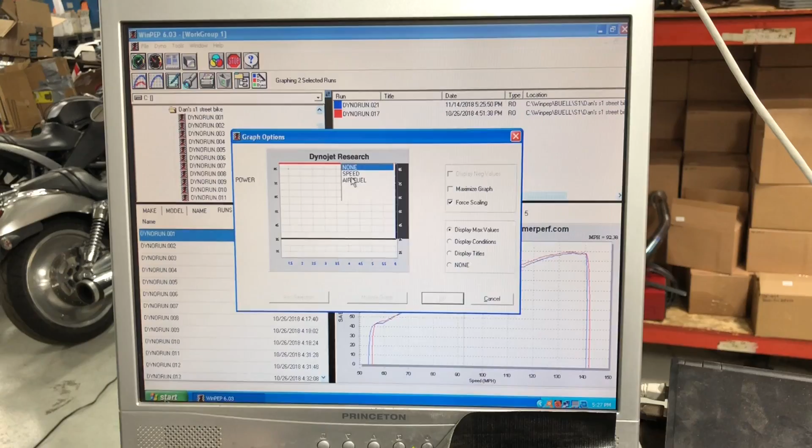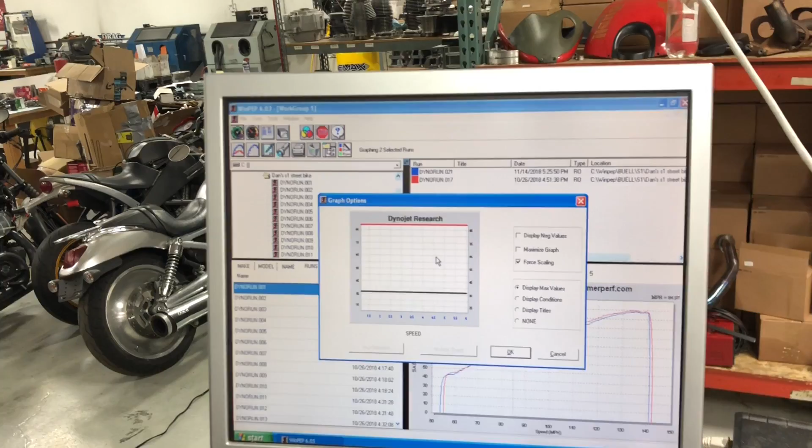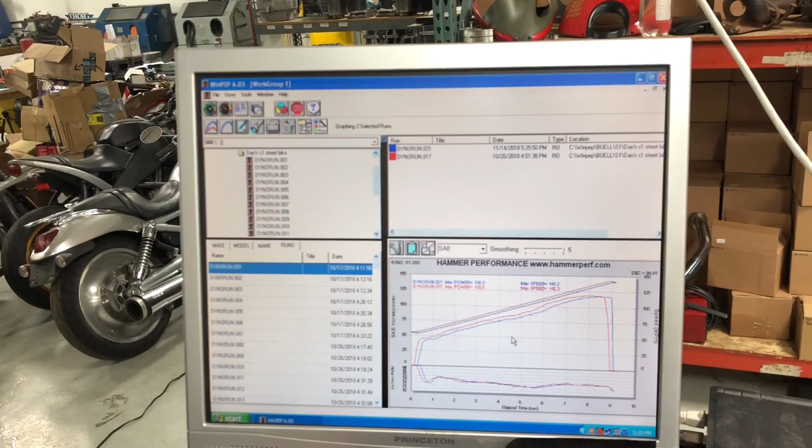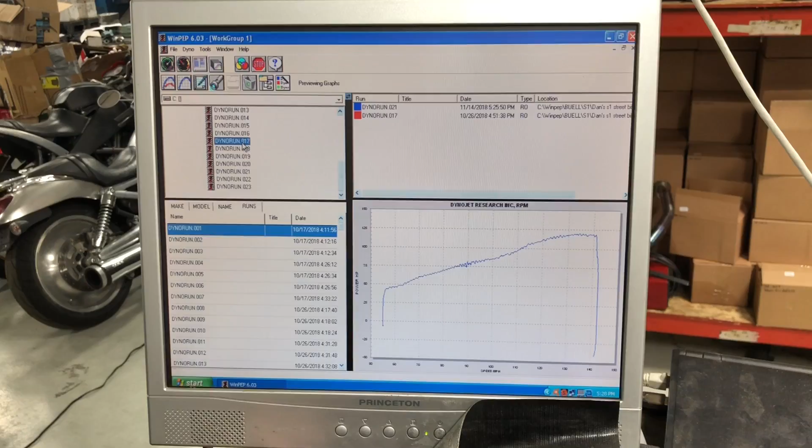So let's get rid of those. My bad. Graph options, multi-graph. You know what, we weren't... Yeah, I don't think we were hooked up properly, so I don't know if we're able to. We can do power, speed, air, fuel. That don't work for us. Anyways, let's do this. So let's go. 021, 017. So we'll fix that and get the RPMs working. I saw on the tach it wasn't working, or on the dyno it wasn't picking anything up.

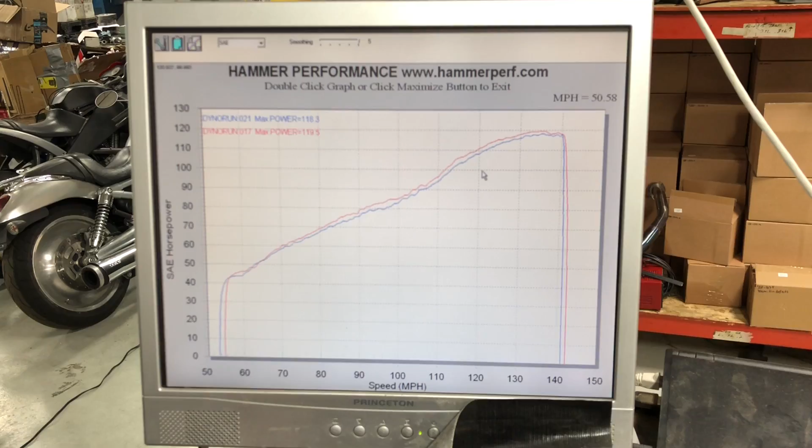So we fell short on our number here a little bit. I think we maybe are a little bit too far advanced on our timing, so I'm going to roll the timing back to the place where we were at the 119.5 and see if we can duplicate that. We'll go ahead and do that here real quick.

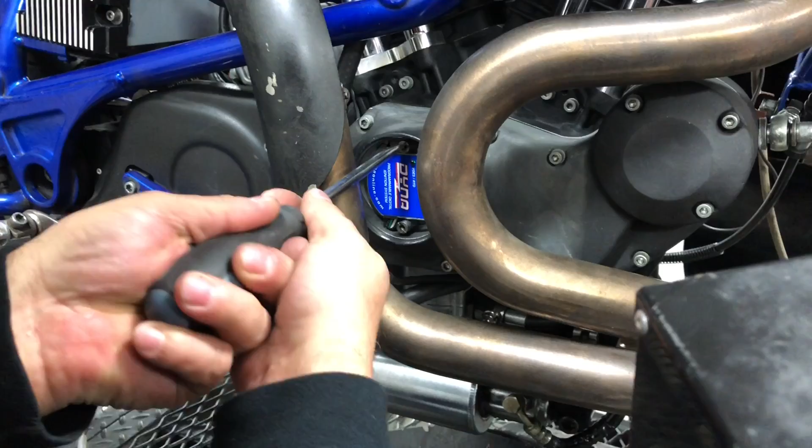So I have a mark on where we were at there. If I can see where we're at, let's put it there. All right, let's give it another shot and see if we can go ahead and change some things here.

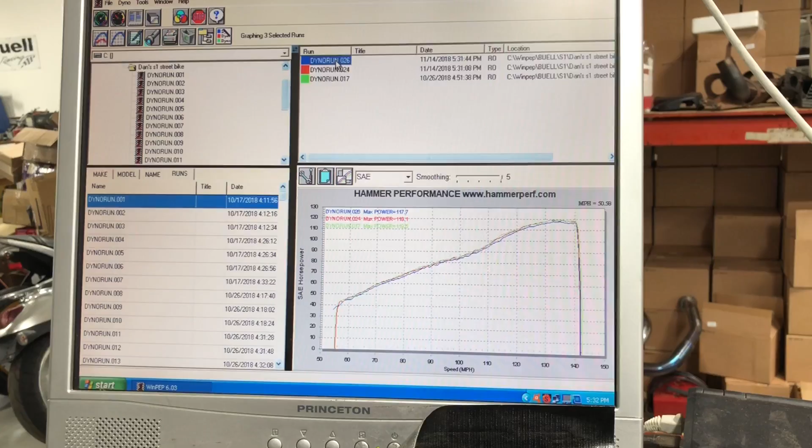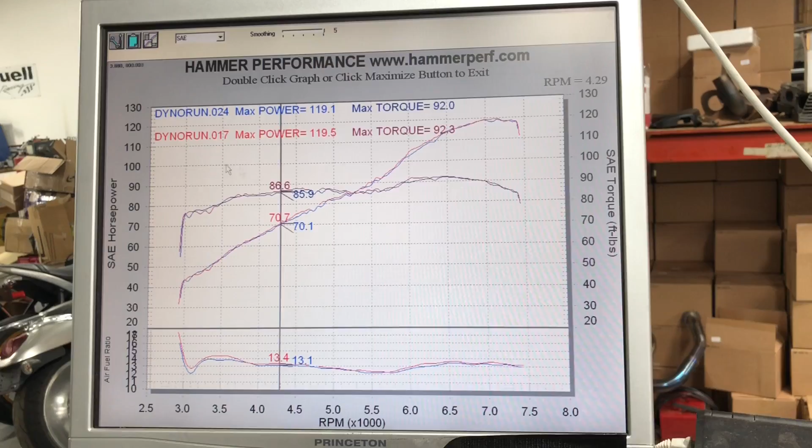Okay, so we got a little bit closer with a 119.1 at 92. So let's go ahead, and that was, I believe, 24. So we'll leave 24, we'll get rid of that, that, and that. Okay, so we kind of basically mimicked where we were at there.

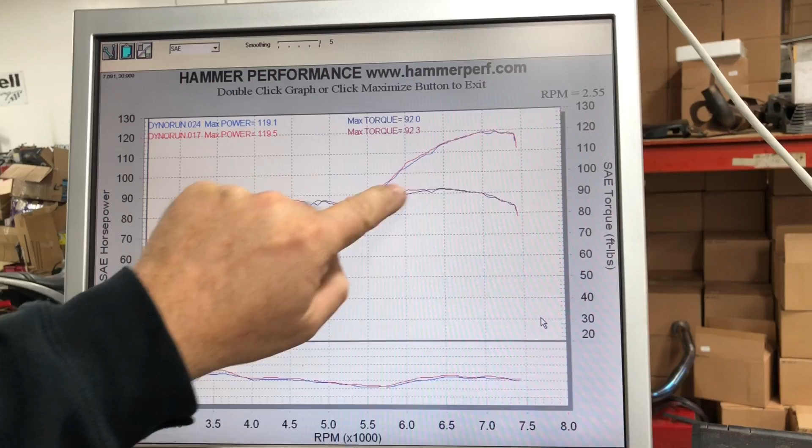You can see how we get a lot of reversion here with this dip, which happens right down here, where the pipe torque peaks, and then it kind of reverts and torque peaks again, which is really nice. We like the double torque peak there because horsepower is torque times RPM, so as we torque peak here up high, we help build that power up there as well. So I really do kind of like the pipe. It works pretty dang good. I'd like to see this a little bit higher and kind of pull a little bit more up there.

I'm going to go ahead and retard the timing, I think, just a little bit more, just to see if it changes our number, if we fall off, or if we pick something up a little bit more by retarding it. We're still a little underneath our line here, so if we retard it, maybe that helps pull that up again to match that number.

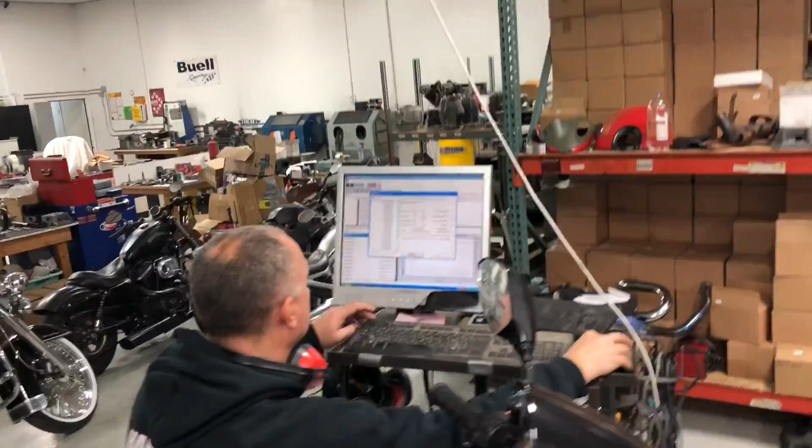We're really close, close to that 120 mark, 92... I'm sure if I keep ripping on it we can get to 120, but I'd like to play with the timing just a little bit more and see if we can find that sweet spot from where we left off. We only changed the timing one time last dyno session, so we'll work with that and play with it a tad more, and see if we can get her to come up a little bit more. So we're going to retard it a little bit more from where we sit.

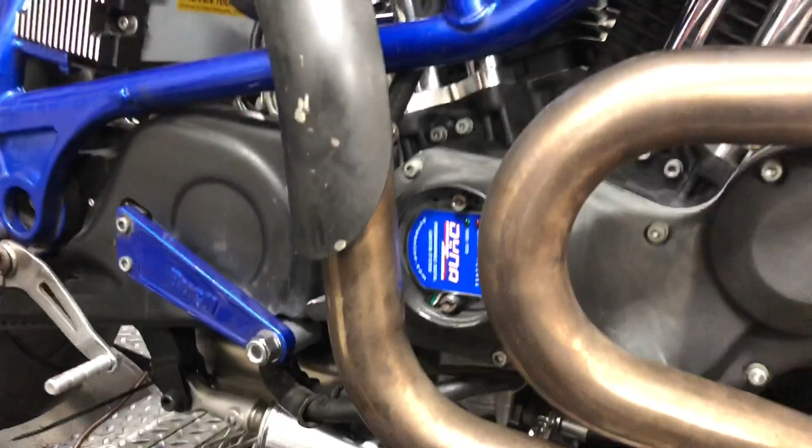Like this. Okay. There we go. Let's cool her down.

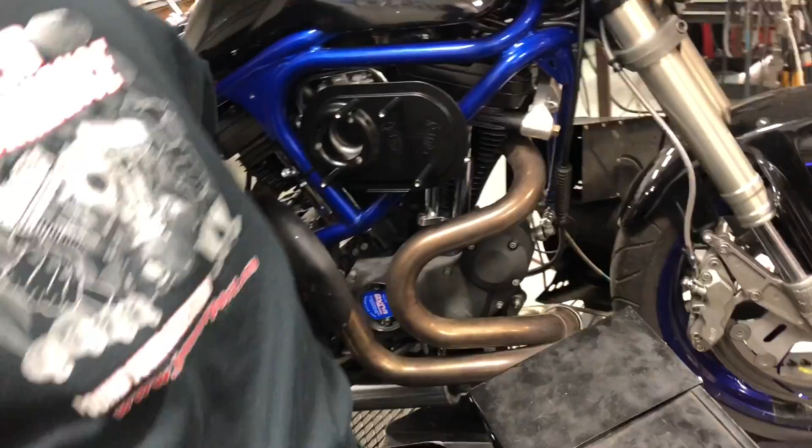We'll let that cool down a little bit before we fire it up again. Cylinders are a little bit more, about 190 on the head temp. Cylinders are dropping down to about 175, so they will cool down pretty fast.

She's gonna be a fun little bike. Even where it sits right now at 119, boy, she should be a wheelie monster. First, second, third gear, kind of excited. A little disappointed the snow is going to start flying on us, so won't have much chance this year to get out and rip on it, but next year it's going to be a fun bike throughout the whole spring and summer. Can't wait to play with her.

All right, let's fire it up.

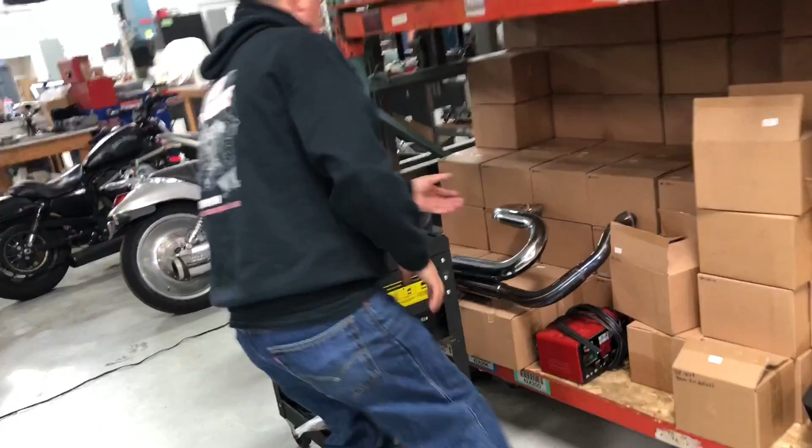Really curious to see in the end here when we take this end cap off what this pipe actually does. With that end cap on there, all of the exhaust gas is going to come through the baffled, perforated portion, then hit the wall on the inside of that cap, and work itself out the angled hole on the end of the exhaust. With the Patriot system, if we look at this while it's cooling down, you can see at the end of the Patriot, in the light, it's wide open through the perforations, and that's all you have. So you got a stepped header with the perforated portion there, and we're coming straight through.

So if my theory is correct, taking that end cap off we're now kind of duplicating the Patriot exactly, because the perforated portion of the SuperTrapp is the same diameter and same hole size as the Patriot. Of course the difference would be the stepped header pipes and the lengths, but I'm curious to see if taking that end cap off, with no back pressure whatsoever, we pick up a peak number on top. So we'll do that one next.

But let's pull this now, let's see where we're at, and see if we can get this to change.

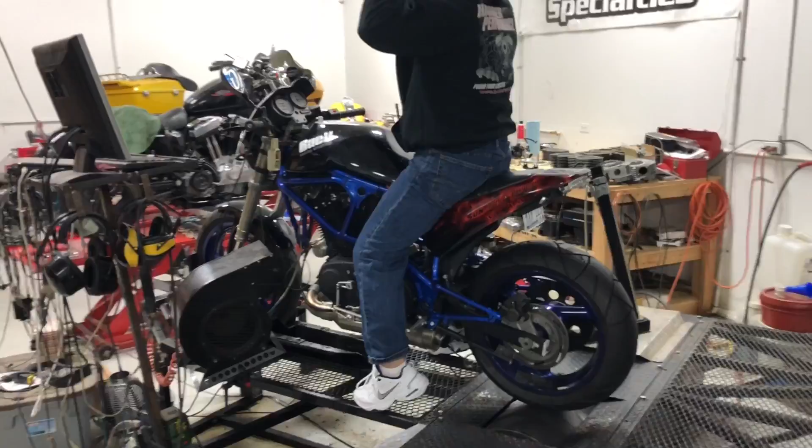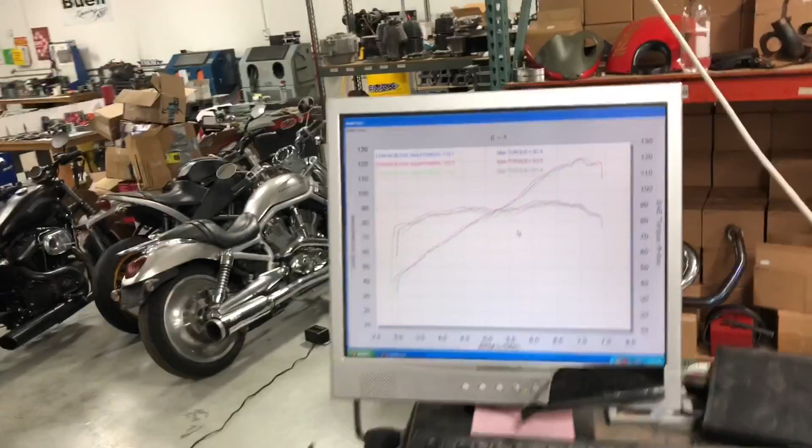All right, that's awesome, we did it. Broke the 120 mark, and even our second pull was 119.7. Adjusting that timing just a little bit definitely helped us. As you can see, just minor tweaks like that bring in a horsepower or two. I know we're splitting hairs here, but my whole goal was to at least see the 120 mark pop up. So that's awesome, we did that.

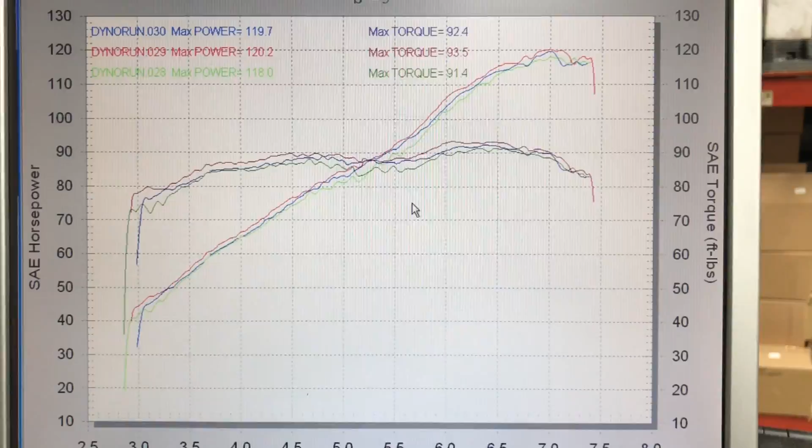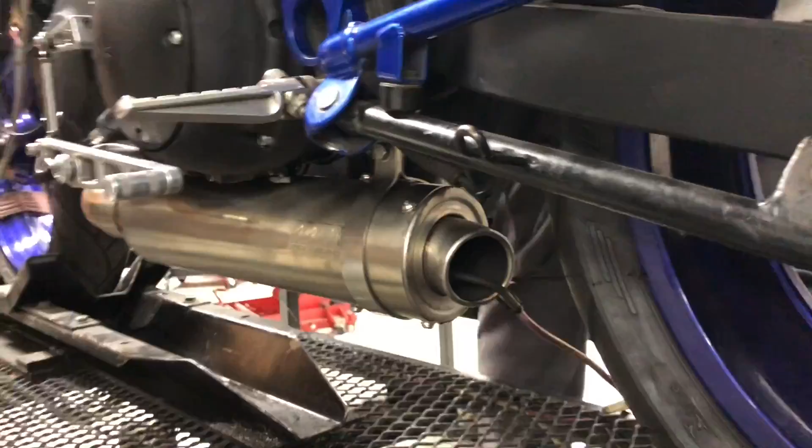We'll see if we can get it to come up more frequently by taking this end cap off. So bear with us here while we take that end cap off. Dwayne, do you want to cut the zip ties on that? Pull the sniffer out of there.

So we're going to need some... Dwayne, will you go over to the area next to your honing bench and get me some black gloves? Ouch, that one. It might be next to the press.

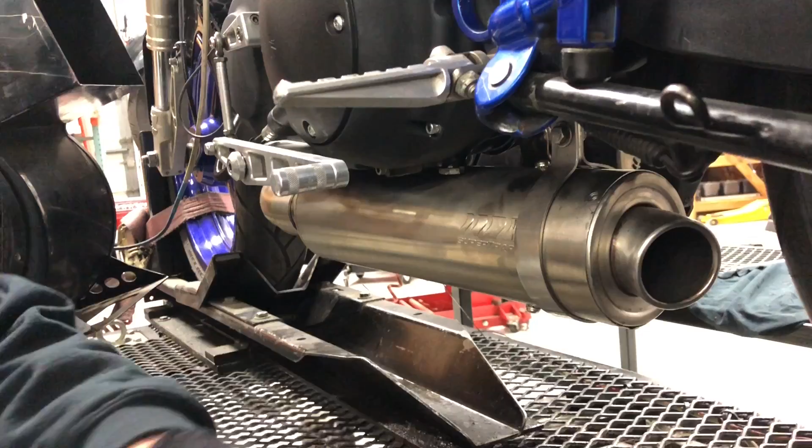Okay, so I got the bolts out. One here, here. Can you get me a right hand one? Two lefties. You're left-handed, right? Yeah, I am, lefty. Not both hands though.

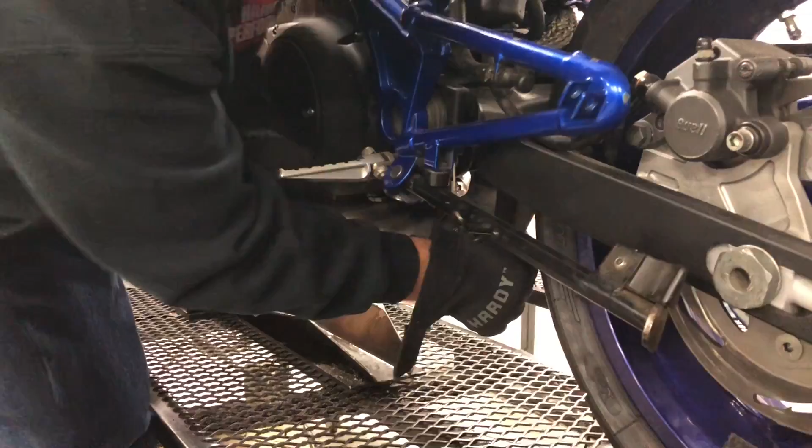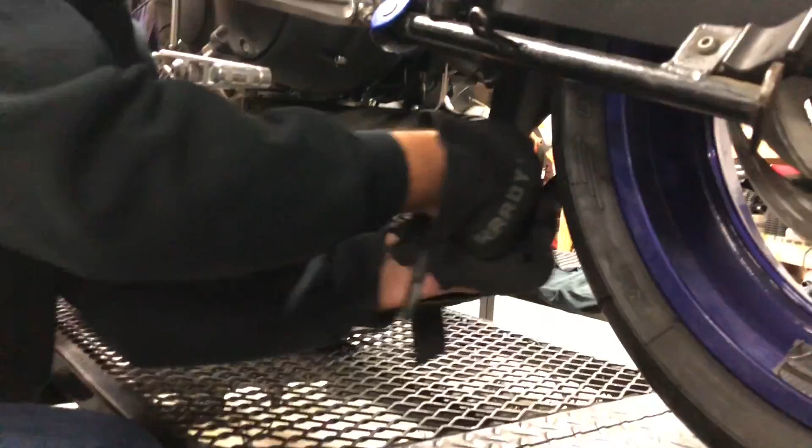Now the key is whether or not we can get that out of there. Got a bugger in there. There we go, it's coming. There, that's very hot, ouch.

Should be plenty of flow. Yeah, that's the whole goal here, just to see. It's a good test to see what opening it wide open like that does on our air-fuel curve, and what it does ultimately on our top-end number. So this will be an interesting test, let's see what we got here.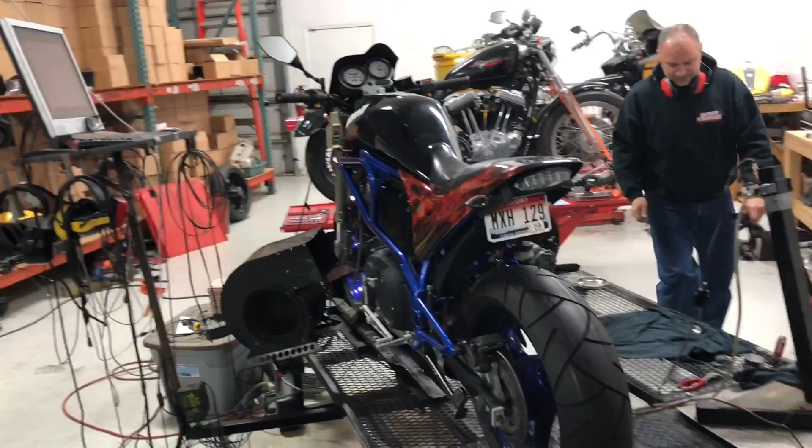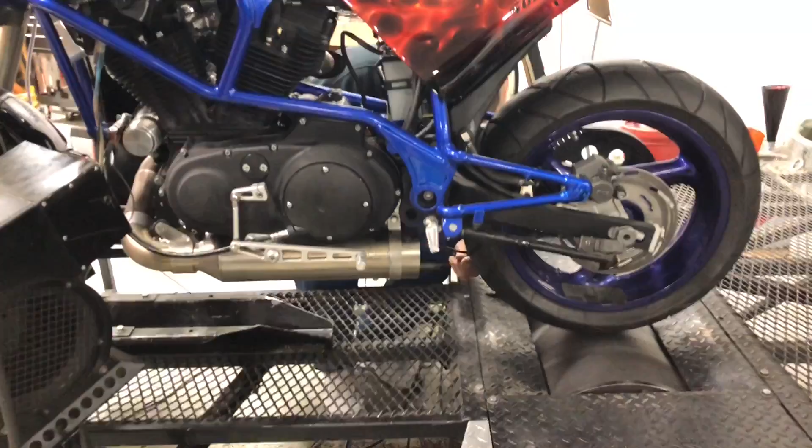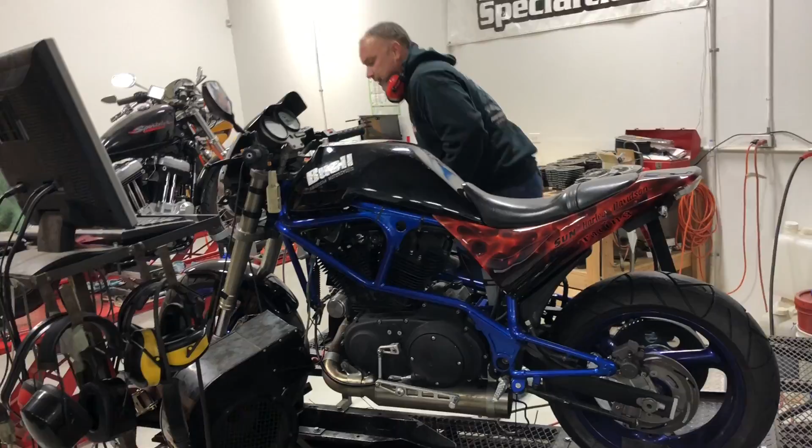So put the sniffer back in real quick. Like this. Okay, let's cool her down here a minute.

Okay, so again, we pulled that cap off the SuperTrapp down there, just for shits and giggles, to see what our theory is. Might shoot us in the ass, but who knows? May work, may gain a few extra ponies at the top. So this will be a true test to see if our back pressure was holding us back a little bit, or maybe it'd go the opposite way and lose power because of it. So we'll go ahead and see.

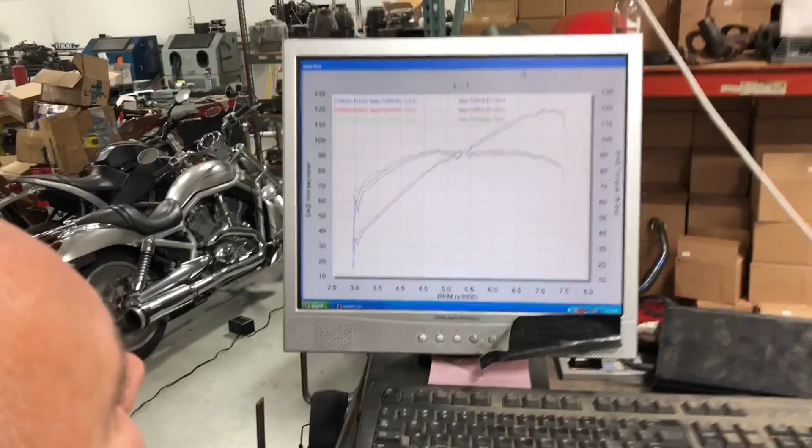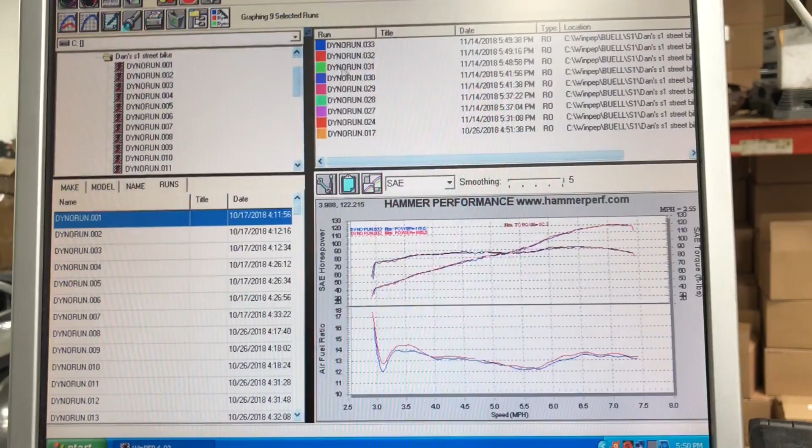All right, so looks like it made a little bit of difference there for us. We're gonna go ahead and get rid of the last pull. So let's do the 31. So 31 was our best. We'll take a look at the AFRs to see. And it looks like our 29 pull was a good one. And we'll get rid of the red.

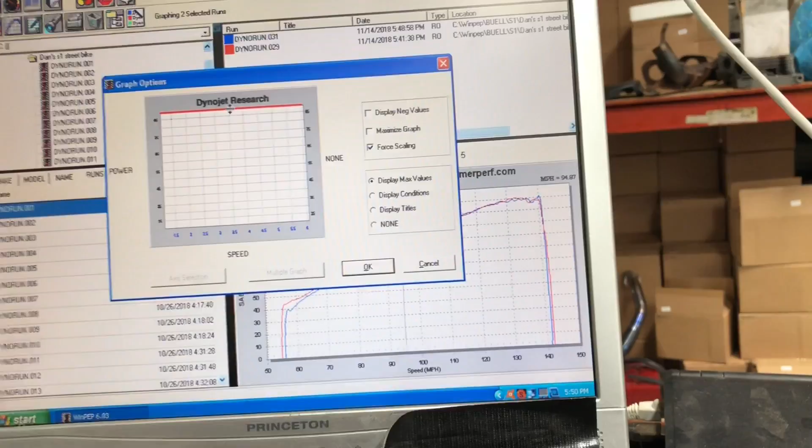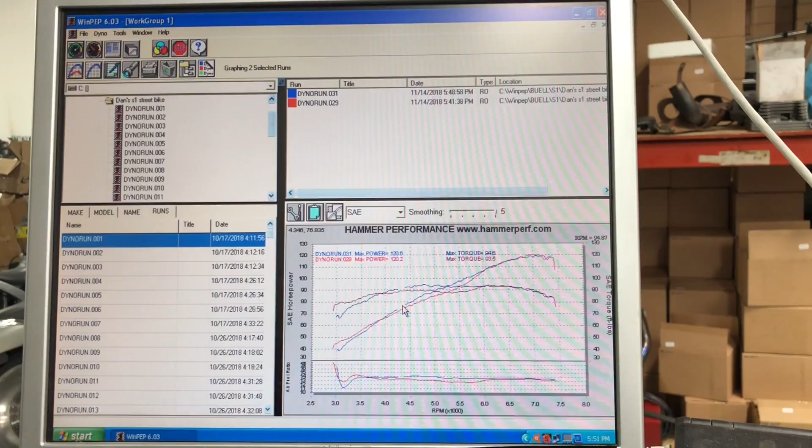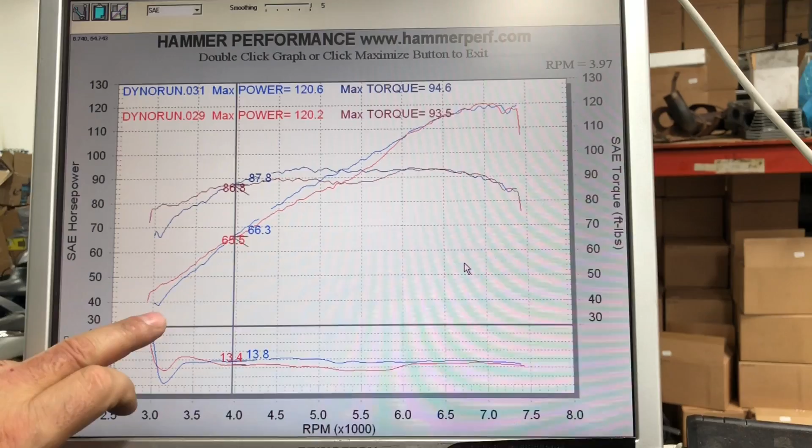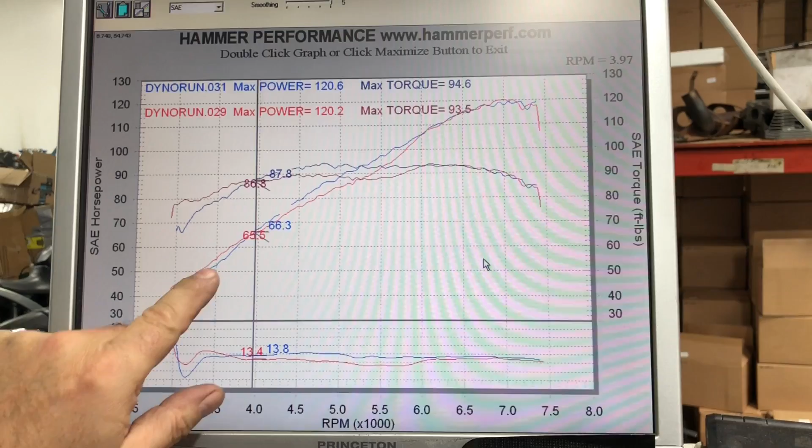Okay, so got a couple different things going on here. So the last pull, the 31 pull, boy, you can see I really like this. So there's going to be some more play in here. I don't think we're quite done yet. If you notice what happened here compared to our other pull where we hit 120 just a while ago before we took the end cap off, you can see here how we had so much reversion or dip in this middle down here where it went super, super fat. Look what happened when we took the end cap off to run it wide open with no back pressure whatsoever. We lost a tad right down here from 3,000 to roughly about 4,000.

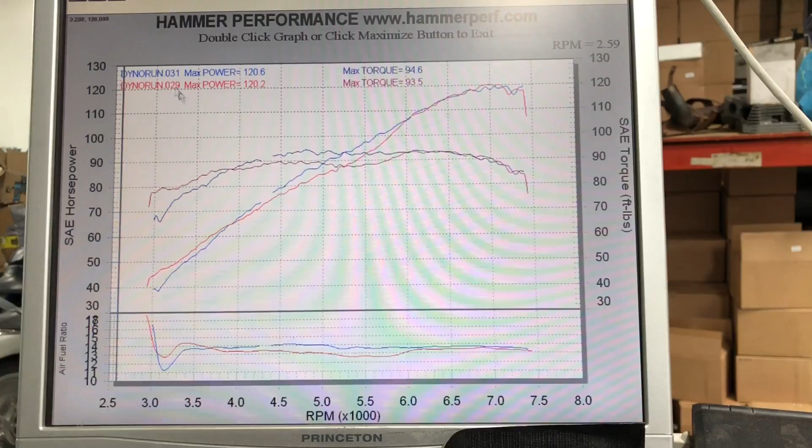So 3,000 RPM range, we're short by maybe a couple horsepower through there, okay? If we look at the two, 48 to 50 it looks like, 53 to 56, 59 to 60. So we're short a horsepower or so right through here. You can see that. Our 31 run, just recent, first of the last pulls here with the end cap off.

But boy, look at what it did to our mid-range. That dip that we saw here where it went really, really fat from the back pressure and the reversion in the pipe, we got rid of that. Isn't that nice? Look at that, just straight all the way up. We get a little choppiness all the way up here at the top. So I'm gonna look at that. Maybe we need to play with timing a little bit more or whatnot.

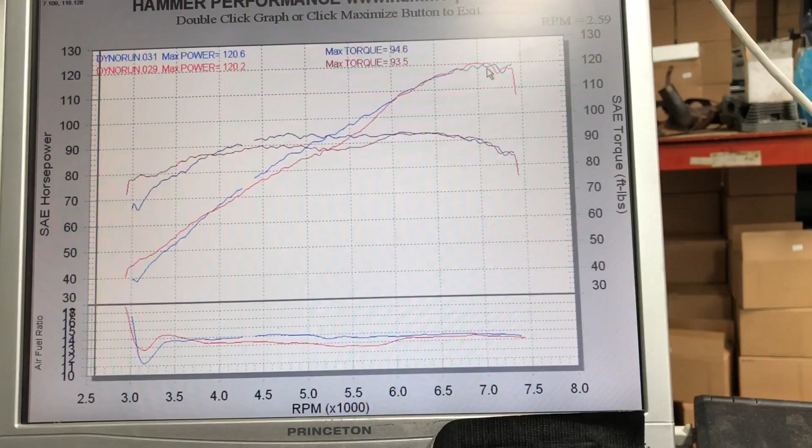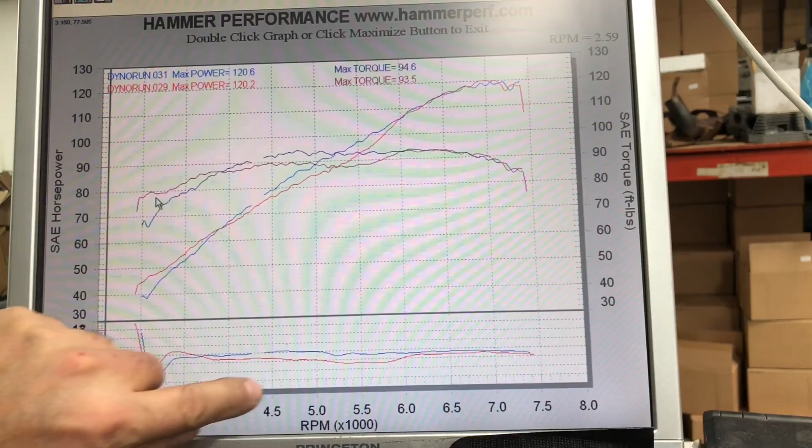You can see we lost some torque here from the loss that we have here as well. Okay, just down low. But we're sacrificing here, which I would be more than happy to sacrifice here because I'm not playing a whole lot at 3 to 4. When I'm playing and riding this bike, man, I'm going from 4 to 7, 75. I'm playing hard up here. So this is really nice that we gained and we didn't lose. And same through here, we picked up so much here in the mid-range.

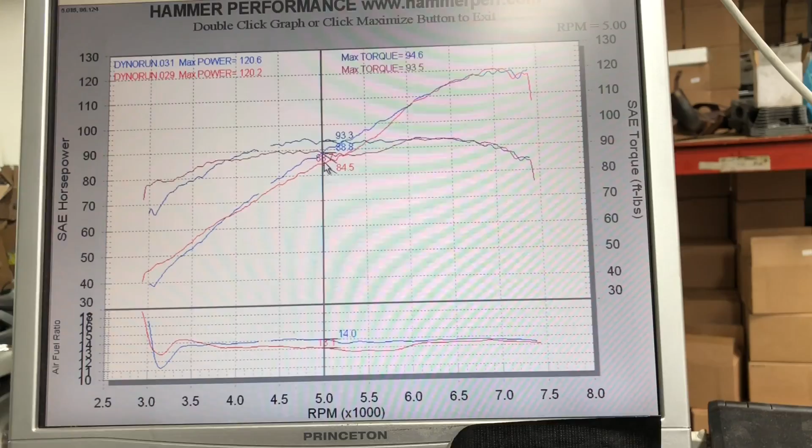If we look at that, as far as our horsepower curve goes here, looks like we go from, let me see here, where are we at here? Looks like we go from 95 to 100, so we picked up 5 horsepower right there through that mid-range. Isn't that something? Right here, it looks like we're at, is that 84? 84 and 88.7, 84, yeah. So 84 to 88 to 93, it looks like. 84 to 88 there. That's just amazing. Just amazing what we gained there.

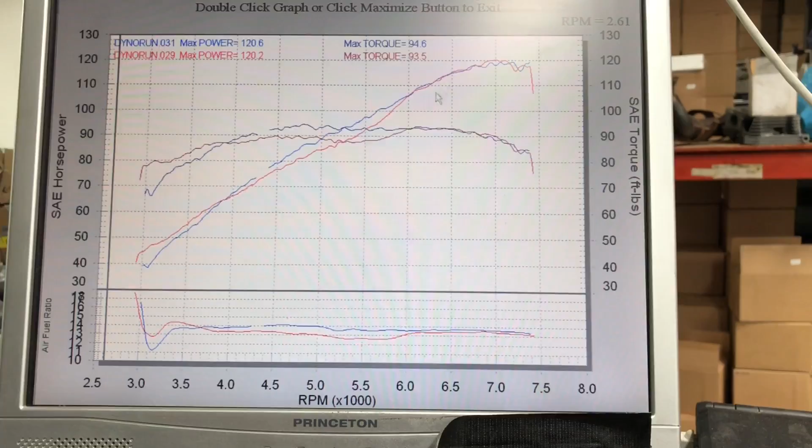So that's promising. We're a little bit choppy up here. Don't know what we got going on there. If we're losing any kind of valve train control up there, it's not too bad, just the one pull. So maybe, and as you can see, so here's the other kicker. There's probably more in here. Stay tuned because I don't think we're done yet. We're going to go play with this and do another session.

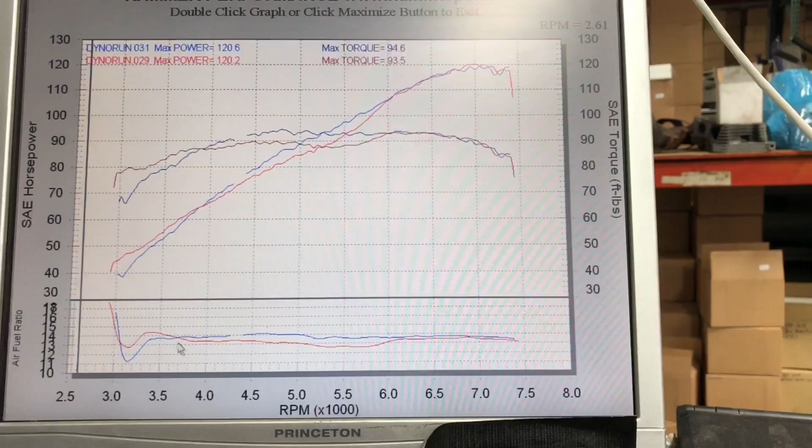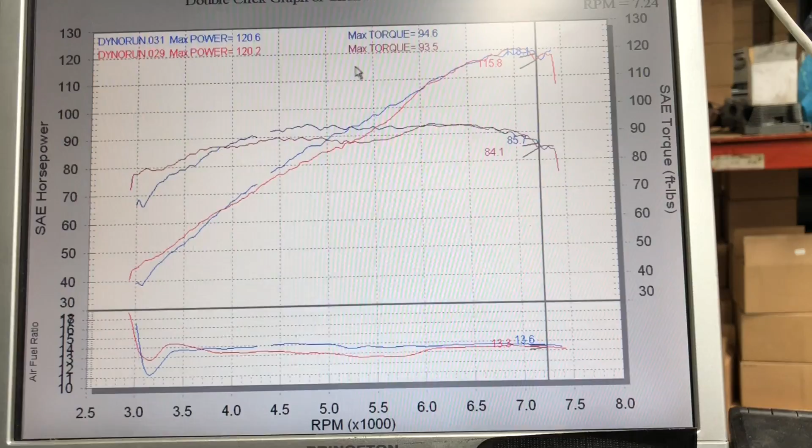We need to go to a bigger jet. I think normally where we find max power is right around 13.1, somewhere in there. There's a jet change here to maybe get us another 2 horsepower or so out of this, maybe more, we'll see. But I'm really liking the fact it picked up the mid-range. So that's pretty awesome. I'm excited on what that brought by pulling that end cap out of there.

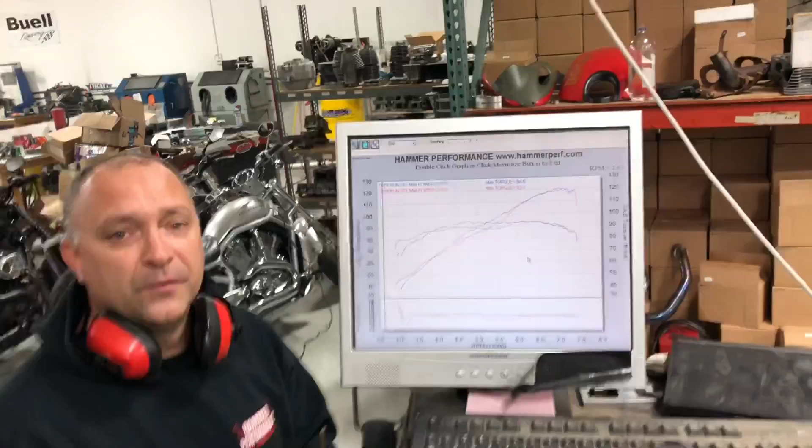So, okay, there you have it. That's what we got out of it so far. I thought this was going to be the last of the tuning sessions. We're going to post this on YouTube so y'all can check it out and everything, but we're going to have another session to play with this. There may be a few more ponies in there.